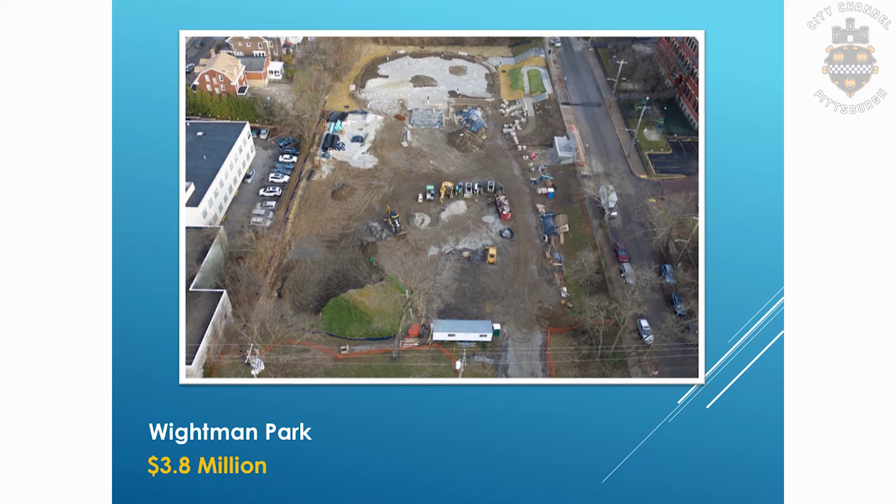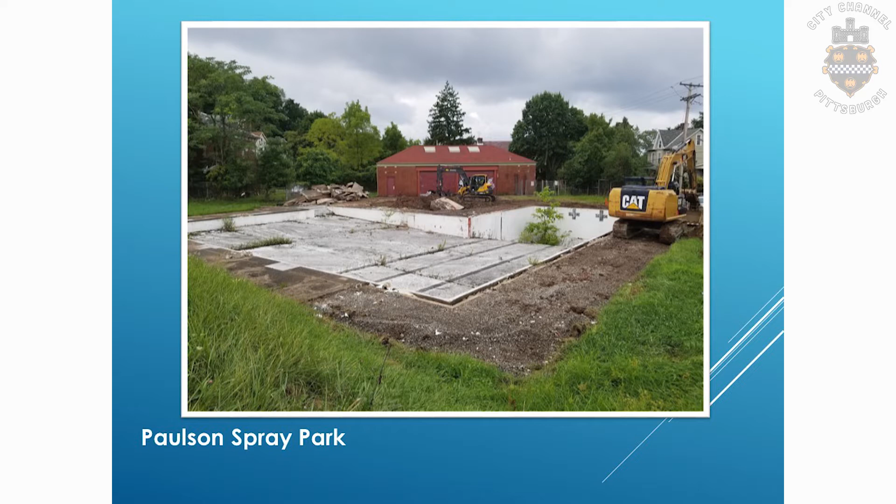The next project is Paulson Spray Park in the Lincoln-Lemington-Belmar neighborhood. It was an old, obsolete, closed pool location, so we converted it to a spray park. It also involved renovation of the play area further up, but the pictures here just show the spray feature.

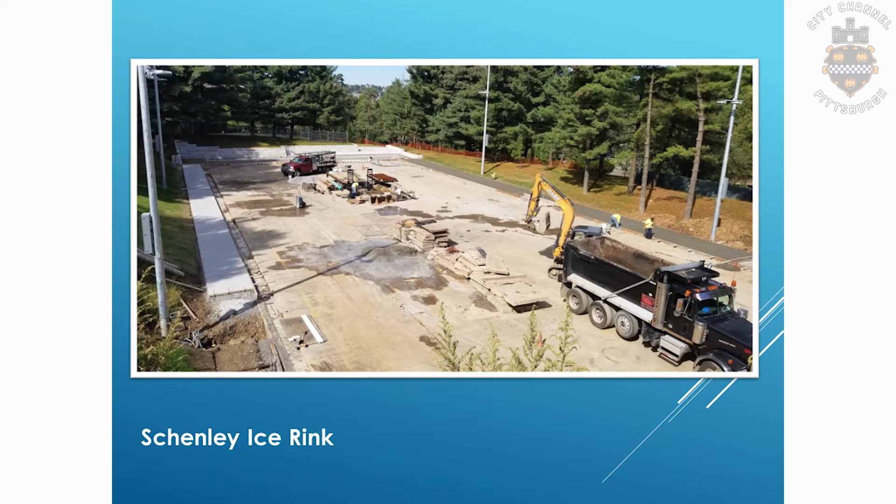The next project is the Schenley Park Ice Rink in the Squirrel Hill neighborhood. We're actually expecting to do a ribbon cutting at that location within the next couple of weeks. It took an old, obsolete ice rink and gave it a new surface, a new cooling system, new lights, and multiple accesses for the public. There's going to be spectator seating, players' benches, and a scoring table for hockey teams — just a great improvement for that asset.

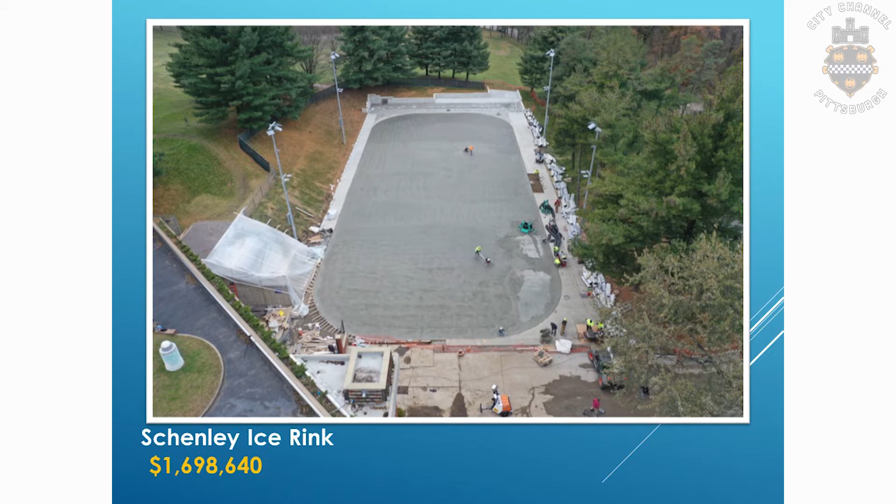The project cost was about $1.7 million, and this just shows the new surface. As I said, we're going to open this up, hopefully with a ribbon cutting on January 17th.

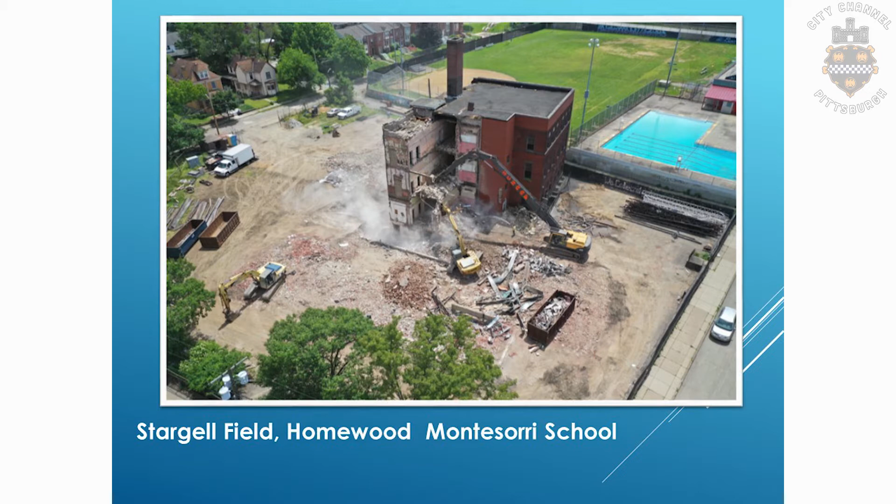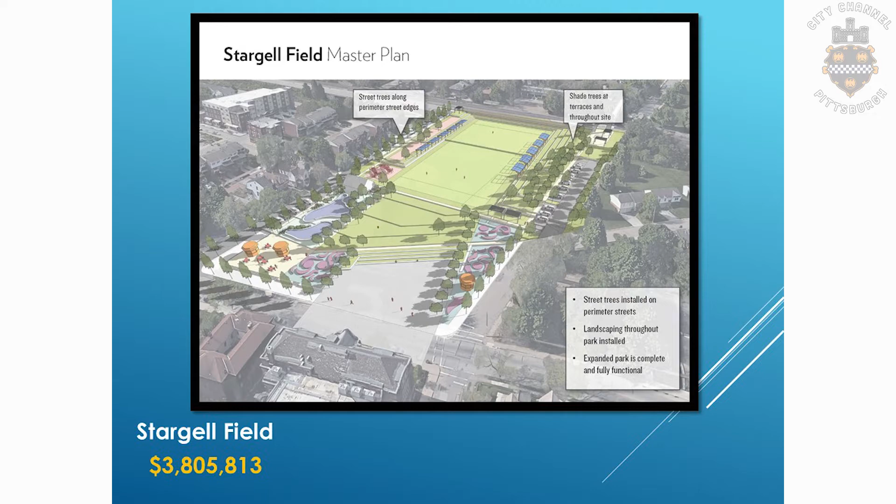This is just a conceptual outline of what the space will be. It'll be a dramatic improvement and enlargement of Homewood Park, but it will have a synthetic surface rather than natural, and it will be able to accommodate multiple sports, including the baseball played there, football, and others.

The next project covers multiple improvements in McKinley Park. This one is up at the Rec Center and Senior Center, by Gearing and Amesbury Street, on the upper level of McKinley Park. We renovated the basketball court outside the Rec Center there, and a local artist did the color coding for that court surface — an improvement for the basketball court, which also has new basketball standards in addition to the color-coded surface.

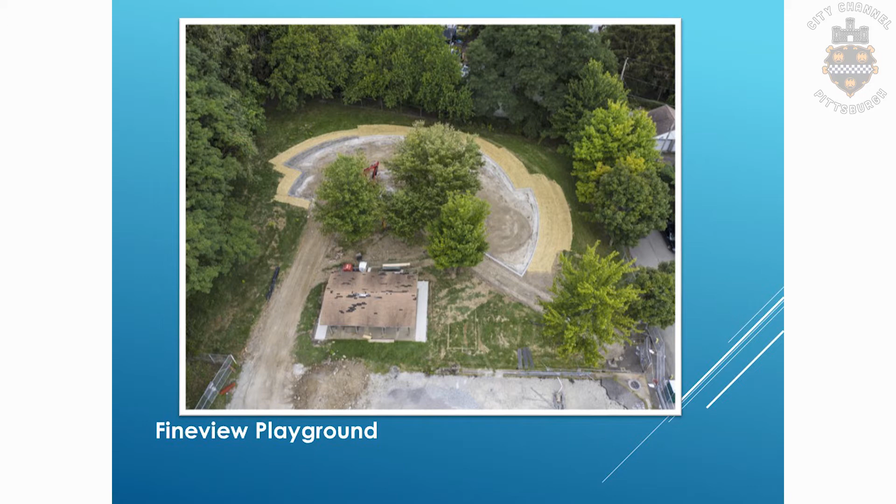Next project is Fineview Playground in the Fineview neighborhood. This is a playground renovation, and again another work in progress, so we'll have some additional stuff on this come next year. This project is in the neighborhood of $680,000. This is just the playground itself, but there are other recreational amenities here. There's basketball courts, there was an open court area that's all being repurposed. So the total project is in the neighborhood of $680,000, and it should be completed very early in 2020.

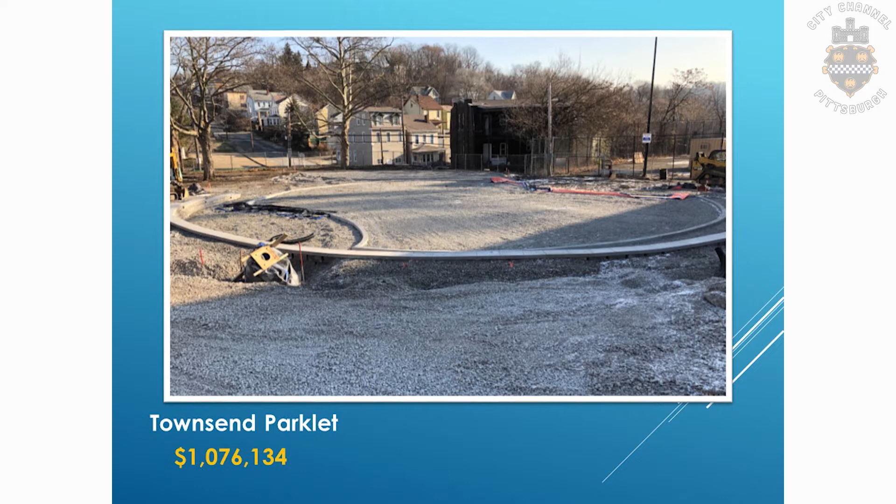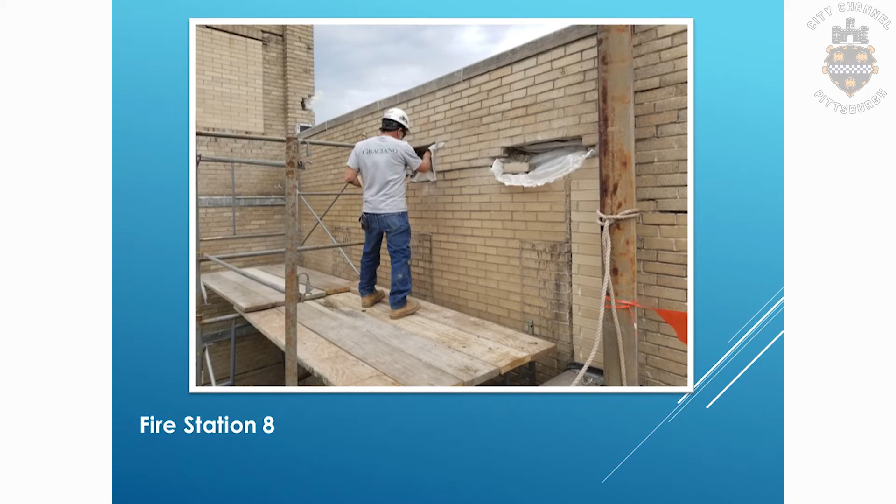Fire Station 8 in the East Liberty neighborhood is a work in progress also, but it's the cleaning and repointing of the brick in preparation for the removal of the tower. The project cost is in the neighborhood of $730,000. This used to be the number 5 police station, and right next to it was Fire Station 8.

And the last project is Medic 10 in the Marshall Shadeland neighborhood. That involves a roof replacement and the cleaning and repointing and replacement of faulty bricks on the whole structure. This is a completed project, and it was a cost of $817,000.

So again, there were a lot of projects we could have picked. I know we showed a lot of work in progress, but again, there will be some nice visuals for when we do this again next year, in addition to whatever is on our plate for 2020. Thank you very much.

While we get the presentation for Director Ricks together, I'm struck by a couple of things in that presentation from DPW. One is the great coordination with city planning on public art. I think it's going to be an exciting season for basketball in 2020, but also, sorry.

Okay, I think this is, do you want to see if this is the right folder, Director Ricks? It is the right folder. It can be sorted by date modified. That would be the most recent one.

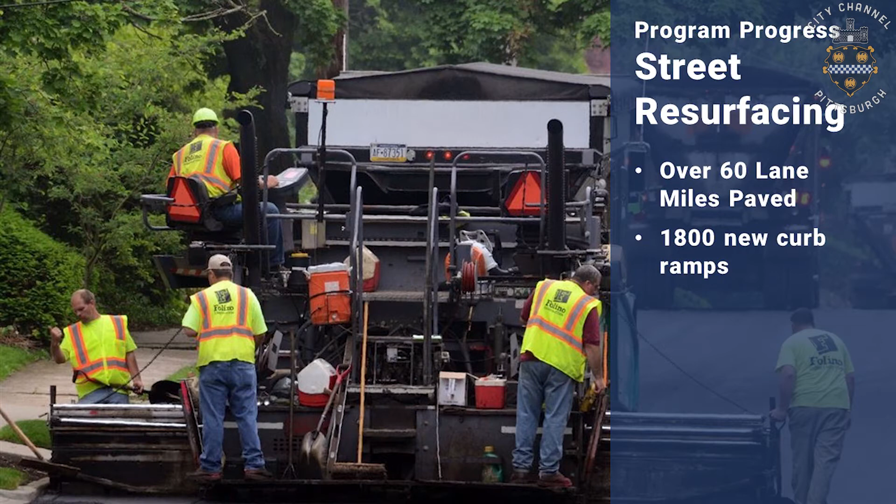The things that we have been able to accomplish in the last 12 months, in 2019, we were fortunate to pave over 60 miles of pavement. We did that in part with our own work, but also through coordination with the utilities that work in our streets, and replaced 1,800 curb ramps for ADA accessibility.

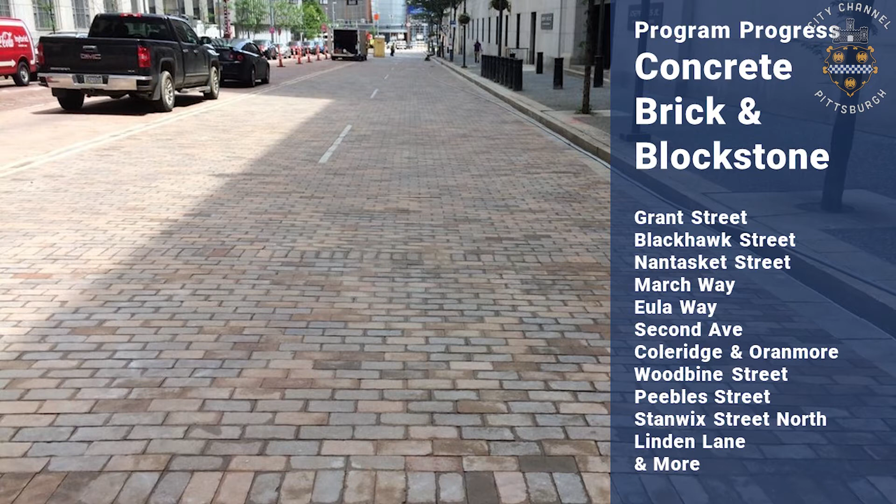We were able to make improvements to a number of concrete, brick, and blockstone streets. I won't go through them all here. Some of these were very large projects, like major restoration on Grant Street, which we hope to continue this year and next year, but also small repairs in a number of our streets with traditional materials on them. This is a huge quality of life improvement for a lot of the neighbors.

We do have a bridge repair program. We have over 160 long span bridges that the city is responsible for, and a vast number of short span bridges, those less than 20 feet in span.

Some of the significant ones we worked on in 2019 that will require additional work in 2020 and 2021: the Larimer Bridge, which we saw some concrete falling from, and some other kinds of immediate repairs that were necessary there; Forbes Avenue over Frick Park; and the South Negley Street Bridge, which is a major reconstruction and rehabilitation project that will go on over the course of the next several years.

Lowrie Street Bridge, which was an immediate remediation project and will now advance into a rehabilitation project; West Carson Street Bridge; 28th Street Bridge; and the two Mission Street bridges, Mission Street East and Mission Street West, where we were able to put new curbs on, new sidewalks, and generally rehabilitate.

In 2019, we invested $1.4 million in local money into the bridge program, and in 2020 that will increase to $2.4 million. This is over and above several million dollars that come from federal aid programs and others.

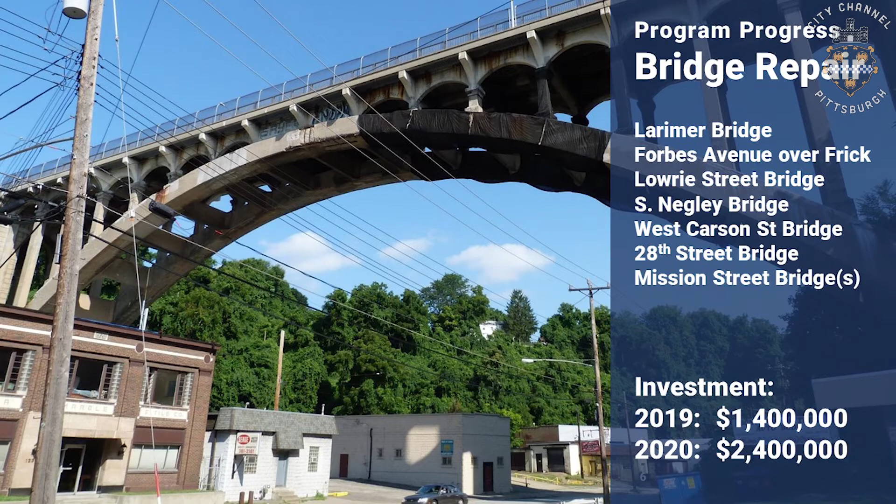Major bridge investments that will continue are the McFerrin Street Bridge, and again Lowrie Street and 28th Street bridges moving into more substantial rehabilitation, and McArdle Roadway Bridge, which will address the Spring and the California Street Bridge.

We're advancing large-scale engineering design for two very large-scale projects: the Charles Anderson Bridge, which of course is an iconic bridge in the city, and the Swinburne Bridge, which carries Frazier Street over Junction Hollow and that portion of Schenley Park. These two bridges are advancing in design now and will go into construction probably still two years from where we are now.

The West Ohio Street Bridge, at long last, after 21 years, will begin construction this coming year. That's a very important and historic rehabilitation that will go on in the North Side communities.

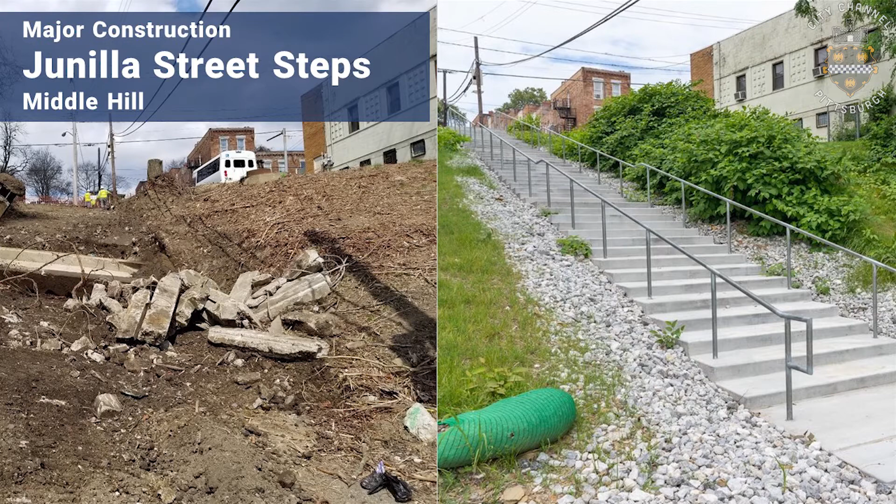We did a number of steps projects, both capital improvement just to repair those steps, as well as full reconstruction, such as here at Junilla Street in Middle Hill—a tremendous change for those steps.

We'll continue this year working and advancing on a number of other steps projects, including James Street steps, Vista Street steps, Frazier Street steps, and others to really improve those critical public stairways. Many of them are progressing in concert with the Art Commission, as in this set here, where we're working to maintain and restore those mosaic installations.

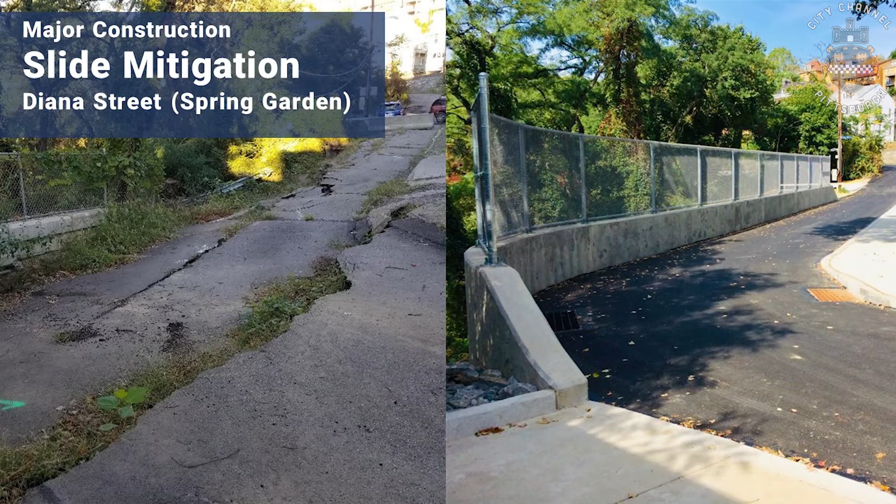We completed slide mitigation for some projects.

Diana Street is one that we're very proud of, made a tremendous change from this slide that began in 2018. Now we're able to fully restore and reopen the street in 2019.

A number of other investments were made, currently ongoing work on List Street, improvements on Ivyglen, Parkwood Road, and Eads Street, and we'll continue that. Forward Avenue and Commercial Street will go under construction in the very near future. Greenleaf Street, a segment in the upper portions of that. The Henderson Street, Semicir, Fallowfield, Troy Hill, Cowley Spray Park area are all slide mitigations that we'll undertake, have begun initial work on in 2019 and will undertake in 2020.

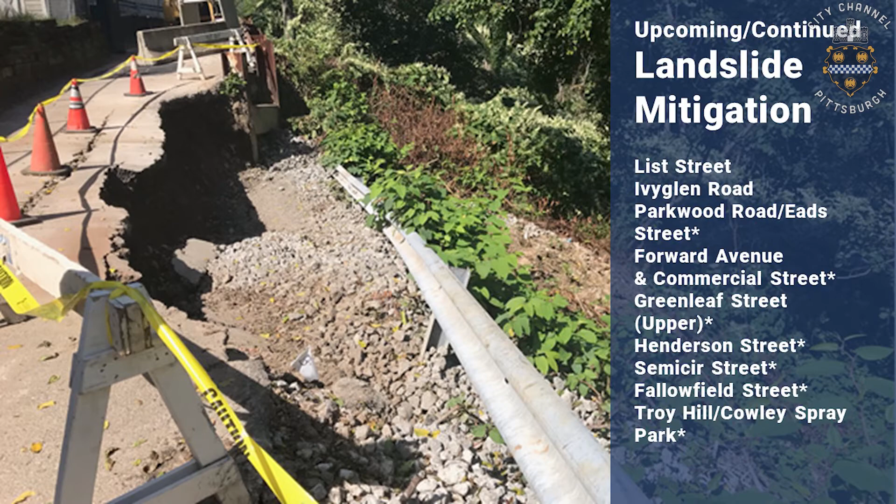Looking at some of our structural sidewalk issues and other structures in the public rights of way, in concert with DPW, we're able to make some profound changes in Mount Washington, in the sidewalks and the overlooks there, throughout the city, working on retaining walls and structures and installing guide rail and fencing.

For flood and stormwater projects, we've begun work on Streets Run as the very first initial phase of improvements in that corridor. Also, again, in concert with DPW, made improvements to Saw Mill Run, and with PWSA, continuing collaboration for 4 Mile Run, flooding and water management improvement for Red Oak and Hayson, Mooney Road, Gladstone Street, and Vodeli, among other locations.

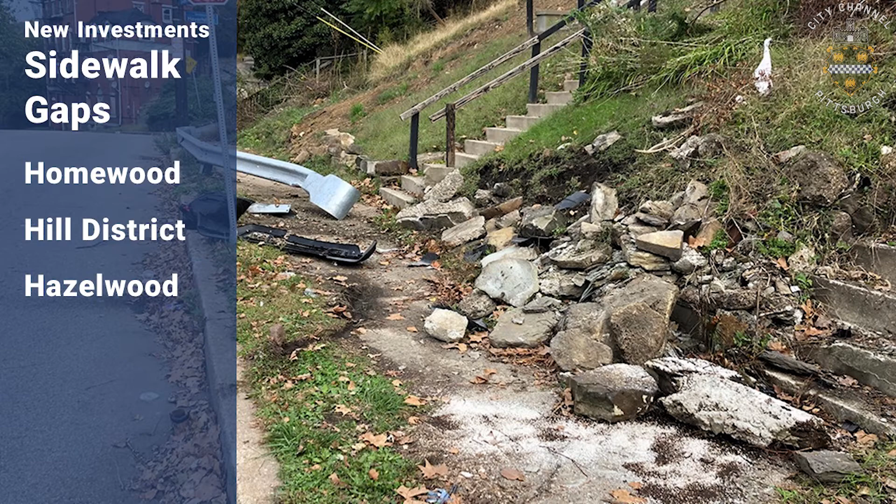We've begun work on a number of sidewalk gaps, improving critical sidewalk access to transit and to community amenities. We've installed new sidewalk in both Homewood and the Hill District, and then in 2020 we'll be doing some more work in Hazelwood.

In partnership with the Pennsylvania Department of Transportation, we've seen a huge transformation of Forbes Avenue in Oakland. Still some cleanup work necessary to do on that project, but by and large, a tremendously successful project that implemented new bike facilities, new streetscaping, upgraded all kinds of facilities, and made the corridor ready for the new bus rapid transit.

The department installed new streets and street trees and a ribbon furnishing zone sidewalk improvements on East Carson Street. Later this year, we'll see the Pennsylvania Department of Transportation come in with a very large project to improve the street and intersections of East Carson Street.

We've implemented the first phase of public realm improvements on Broadway Avenue in Beechview - pedestrian safety improvements, operational improvements - that will be followed later on this year by public art and placemaking enhancements in concert with the Public Art Commission.

We've begun construction now on the Wenzell Carnahan intersection, again a long design project to really implement more safety and operational improvements at this very important intersection, Banksville Road and Carnahan.

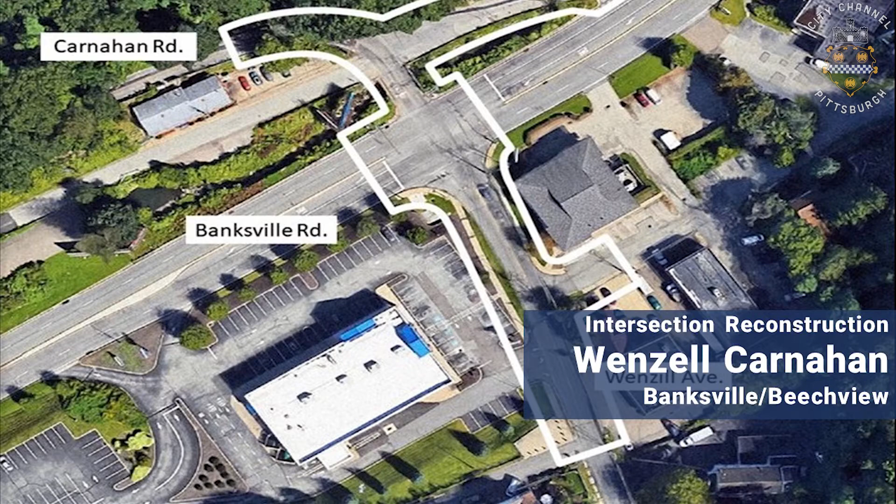Allegheny Circle, later on this year, will begin implementation for conversion of this one-way rotary back to a traditional two-way operational street system with a bicycle cycle track in the street. So that will again make a tremendous change. This has been a long coordinated project with local communities there, with the private development interests, the many employers. So we're excited to see that transformational change finally happen in 2020.

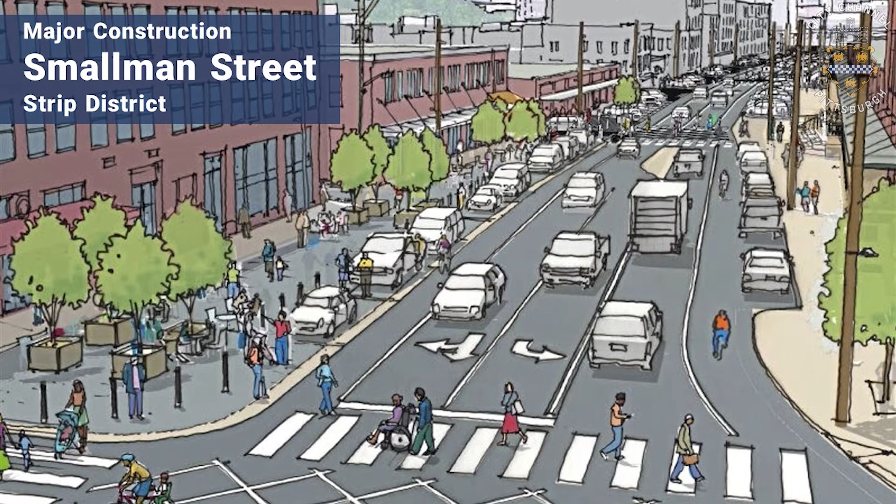Smallman Street, again, a hugely transformative project in concert with reuse and rehabilitation of the old produce terminal building, making a tremendous change to a 5-block segment of this street that will add proper pedestrian accommodations, great placemaking opportunities, improved bicycle accommodation, and really play off the opportunities of the iconic church that's there and the retail opportunities along the street, really being another great street in the Strip District.

In coordination with the Port Authority of Allegheny County, we've been advancing the Bus Rapid Transit Project. This is a 3-branch bus improvement that connects from Squirrel Hill, Highland Park, and then on out to Wilkinsburg, to the Oakland community, and then as a rapid dedicated spine from Oakland to the Central Business District. In total, it's about a $200 million capital investment that will be implemented in the next few years. So continuing engineering design, engineering work, and general coordination for this project that affects 5th and Forbes Avenue through Oakland and Uptown and downtown.

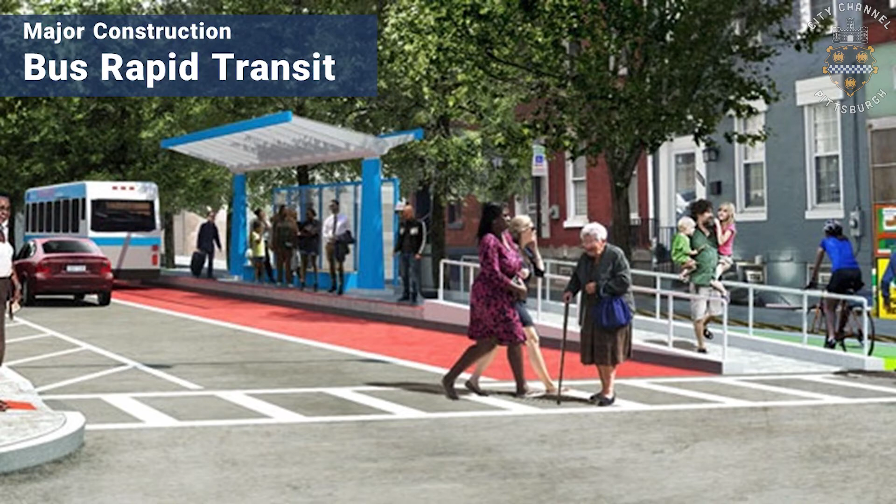A lot of work progressed from our sign and paint shop, who are a small handful of folks doing tremendous work all across the city. They've striped over 400 miles of lane markings throughout the city, installed 3,500 waterborne crosswalk markings, 400 thermoplastic crosswalks thanks to a new thermoplastic machine we were able to use just this year, 2,500 stop bars, 2,000 signs, and 2,700 sign repairs that have gone on throughout the city.

A number of traffic calming programs. This is just the second year that we've had a city traffic calming program, and it's proved to be in high demand from many communities across the city. Here's a listing of the number of different places where we've installed traffic calming.

I'm obliged to remind folks that speed humps are not the only traffic calming tool that we have. There's a number of different tools, but we have installed a number of speed humps on many streets across the city this year.

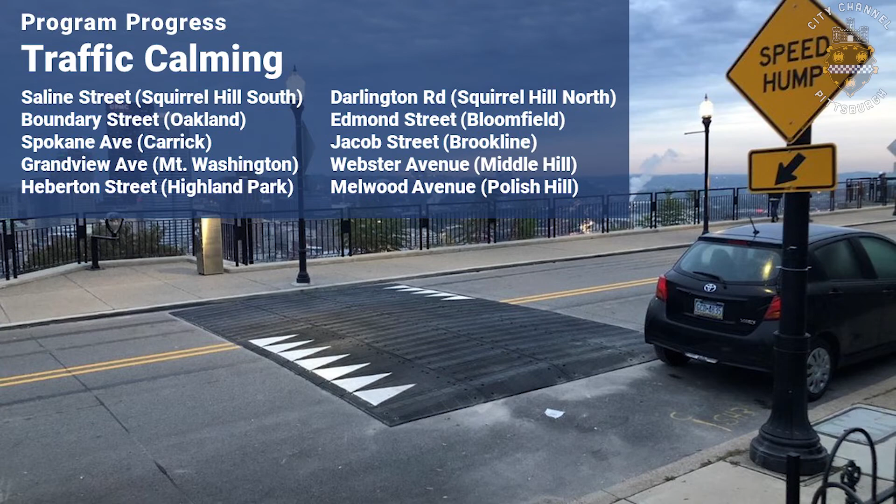We've undertaken a number of safety and complete streets projects, among them the Broad Street Road Diet, the Southside Slow Street, which provides a parallel bicycle and pedestrian connection just north of East Carson Street, and the Chateau Street Road Diet, which will be implemented in the near future. We've also improved business district crosswalks in all of our major business districts across the city, and are implementing the Willow and Hatfield Slow Street in the Strip District, and the Lawrenceville Neighborway.

Working with communities on intersections and crossings, we've implemented a number of safety projects at Frankstown at Liberty, Millerton at 65, Penn at Sheridan, 5th and Bellefield, Woodruff and Merrimack, and Davidson at 40th, which have really improved pedestrian crossings, improved safety, and have been much lauded by those communities.

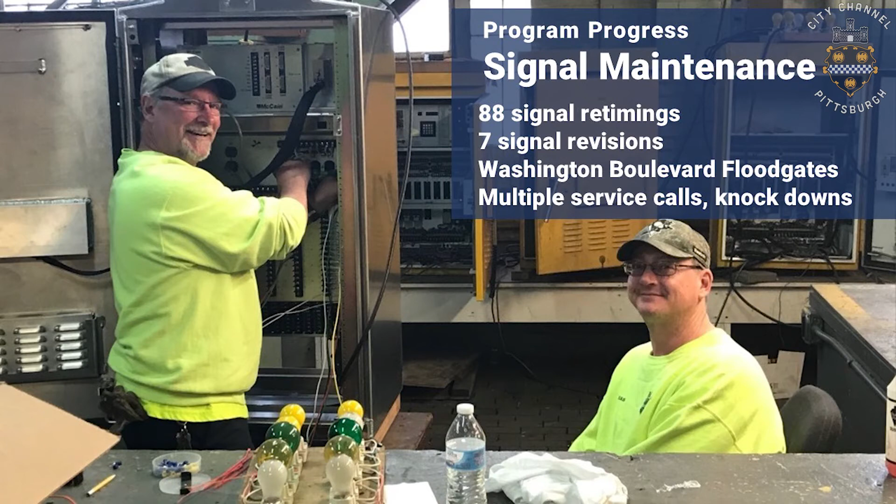We've done a tremendous amount of signal maintenance. We have about 660 signalized intersections across the city, and in the past year we've retimed 88 of those 660 intersections. That provides for better pedestrian crossings, better flow of traffic in our system, turn movements, and other improvements. So it's important to keep those timings up to date.

We've implemented 7 signal revisions, which involve equipment upgrades at various intersections, multiple improvements to the Washington Boulevard floodgates as we've seen various events happen down in that area, and a number of service calls across the city—knockdowns in response to crashes and other kinds of events that our folks are happy to head out and address.

We've installed new signals or upgraded signals at 5th and Negley, Bigelow and Centre, working on Centre, Aiken and Liberty, and Shady and Wilkins, implementing a number of signals throughout the CBD. We'll be doing pedestrian signal improvements throughout downtown, and that work is just beginning.

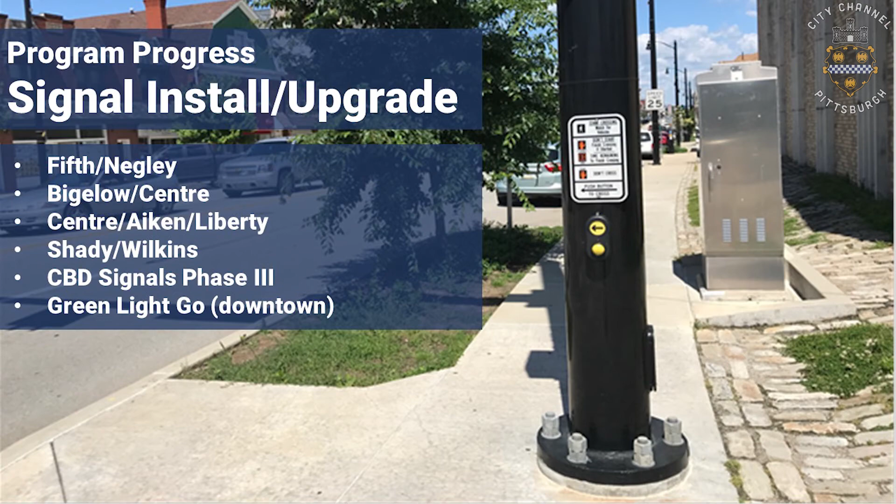We've begun work on our Smart Spine network. This is a federally funded $26 million project to have a series of state-of-the-art signals running along major arterials of our city that can facilitate even traffic flow, advantage transit mobility, provide good accommodation for pedestrians and pedestrian crossings, and really provide that smart network that we need to become the city of the next century.

We're working on a number of streetlight improvements, adding streetlights to various corridors of the city, replacing and upgrading streetlight fixtures. We launched a safe driving pledge as part of our traffic calming program, where we're really engaging the public and making them a partner with us in managing traffic speeds. In March of 2019, we released the mayor's executive order on autonomous vehicle testing.

This is a first-in-the-nation approach to really guiding, partnering with, and directing the testing of autonomous vehicles, as we've seen throughout the city, and working with community partners to bring them in line with what we call the Pittsburgh principles, which are 10 principles for the kind of city that we want to preserve even as we welcome some of these new technological advancements.

We're working on completion of our Bike Plus plan and implementation of a number of bicycle facilities throughout the city. We've seen tremendous increases in bicycle use, and now we need to provide those safe facilities that will allow all users to travel.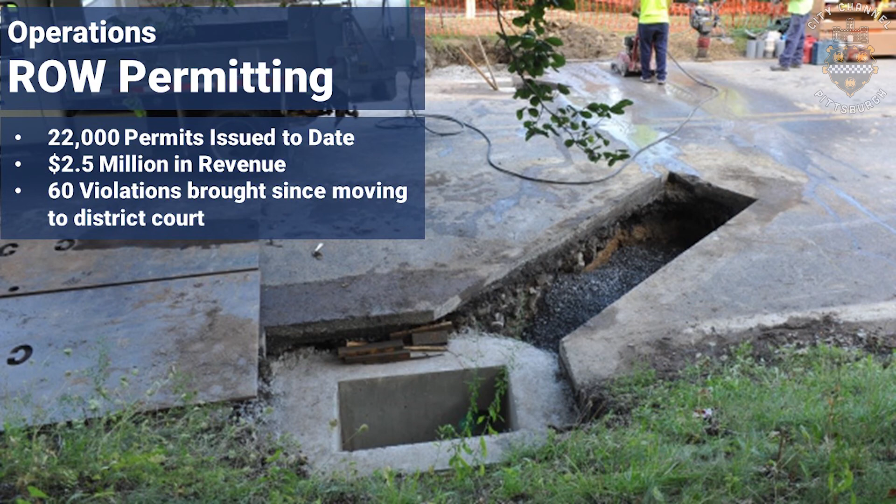We continue to improve our right-of-way permitting. We've issued over 22,000 permits, actually about 30,000 by the end of the year. We've generated more than $2.5 million in permit revenue through management of the public space, and we're getting better about enforcement. We've issued 60 violations, not because we want to tout that, but we're demanding more accountability and better compliance with our permitting regulations, for the protection of our public assets.

In 2020, permitting will go online, following our sister departments of PLI and Zoning. DOMI will then be online, and that should facilitate a lot of our permitting processes, coordination, and permit review.

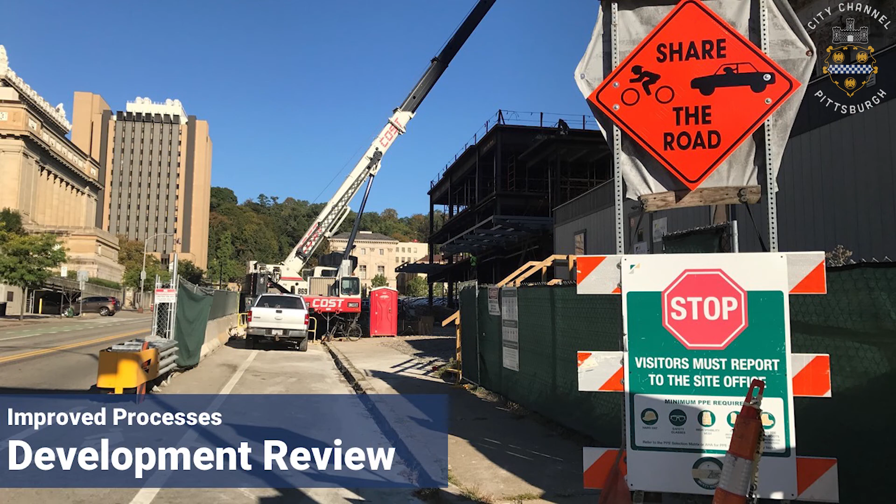A number of large development projects are happening. We're happy that Pittsburgh is a growing city with a number of new developments, and that requires reviews from our engineering staff, planning staff, and traffic staff to make sure the restoration of the right-of-way follows our standards, that we have good quality construction, that traffic operations to support this new development are in place, and that throughout the course of development we're maintaining safety on our streets. I want to really thank our staff—while we're a fairly small team, they do a tremendous amount of work, partnering with various organizations, neighbors, constituents, council, and others who help us get our work done.

So we've been able to accomplish a lot in 2019, and we're looking forward to doing even more in 2020. Thanks, David.

In every one of these iterations, we'll be emailing department leadership to make sure they understand that the funds are available and ready to spend. The bond will probably be closing in mid-April.

And then CDBG—unfortunately we're at the mercy of the federal government, that's usually in the fall. So you can expect CDBG dollars available in the fall.